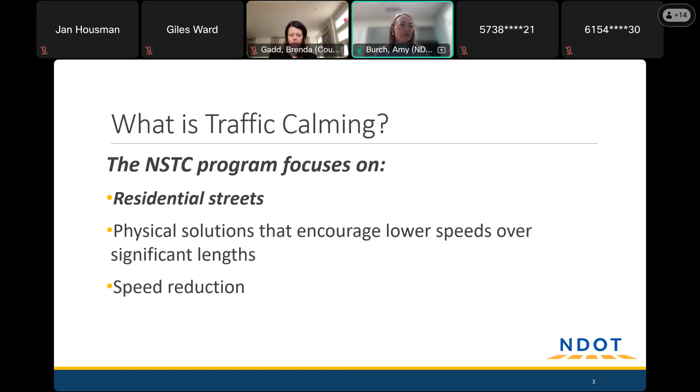So let's talk about traffic calming. What is it? The Neighborhood Street Traffic Calming Program focuses on residential streets, similar to Estes Road. What we're doing is implementing physical solutions that encourage lower speeds over the length of the street, really targeting vehicular speed.

Our 3 E's of traffic calming: education—we do a lot of education through social media, NDOT does a lot of social media engagement and education, as well as all the meetings we have for each individual street, where you're learning about speeding and traffic calming. Then there's enforcement, which is the job of NDOT's partners, the police department. They are certainly partners in the goal of reducing speeding across the city, but the police cannot enforce speed control across all the streets 24 hours a day, 7 days a week.

And so engineering is the part that NDOT mainly focuses on, and that is how do we modify the design and character of the street to encourage drivers to drive at a slow, appropriate speed.

One of the main reasons we're doing this is for safety, and NDOT's commitment to Vision Zero.

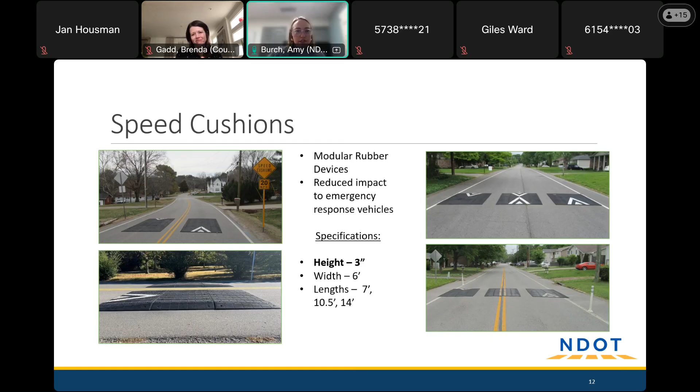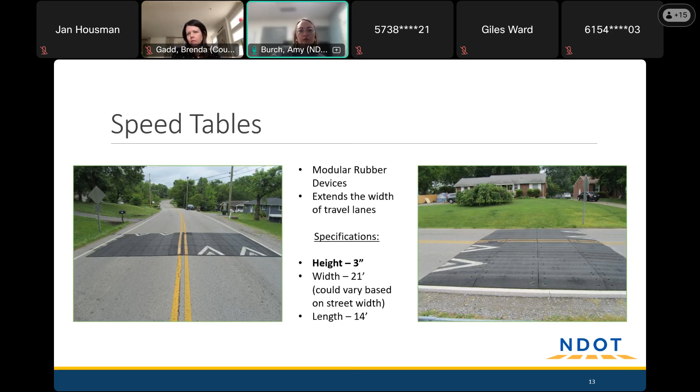Speed tables are made out of the same material, but they are formed in a different way across the width of the street, so they stretch the whole width instead of having those gaps like you saw on the speed cushions. We use these less often because we don't want to cause additional delay for emergency vehicles. So they're used less often, but they do have their place sometimes. Same material, markings, signs, all very similar.

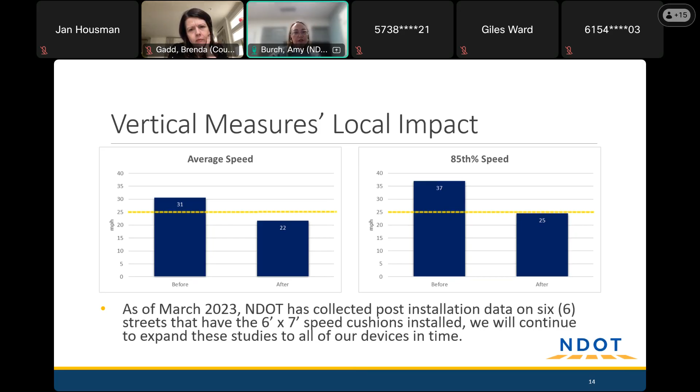NDOT has done some before and after studies of speed cushion installations across the city, and found that they are very effective in achieving our goals of slowing speeds. We studied 6 streets, and the graph on the left shows an average speed comparison before and after the speed cushions were installed. The before speed was 31 miles per hour, and after installation the average speed went down to 22 miles per hour. On the right is the 85th percentile speed comparison. The before speed was 37 miles per hour, and the after speed was 25 miles per hour. So very effective in helping us reach these goals.

We also use radar feedback signs quite a bit. You've probably seen them on a number of streets around Green Hills and elsewhere. These are signs that show a driver their speed as they approach the sign, and it's a reminder for drivers. Some drivers just don't realize how fast they're going, and this puts it in their view, and they slow down. We've seen effective results here as well using this tool, seeing the average speed go down by 6 miles per hour, and the 85th percentile speed go down about 7 miles per hour.

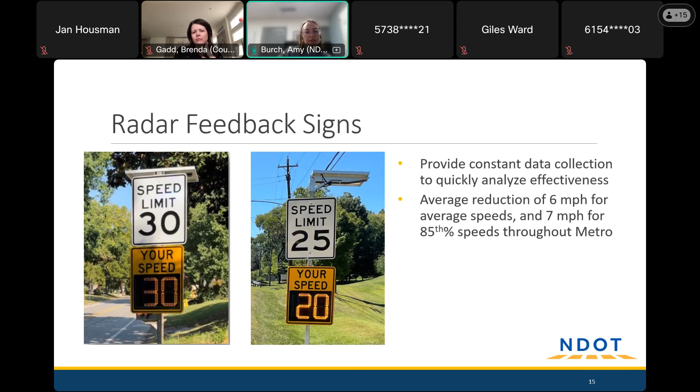These are often used in places where vertical measures aren't desired or not possible to install. We aren't able to install vertical measures on steep hills or in tight curves. So sometimes these tools, the radar feedback signs, are best to install in those locations.

Street narrowing: sometimes we have residential streets that are wide, and it just feels very open for drivers, which encourages some speeding. So we've implemented edge lines to narrow the travel way. This can also create a little bit of a shoulder for pedestrians, increasing their comfort.

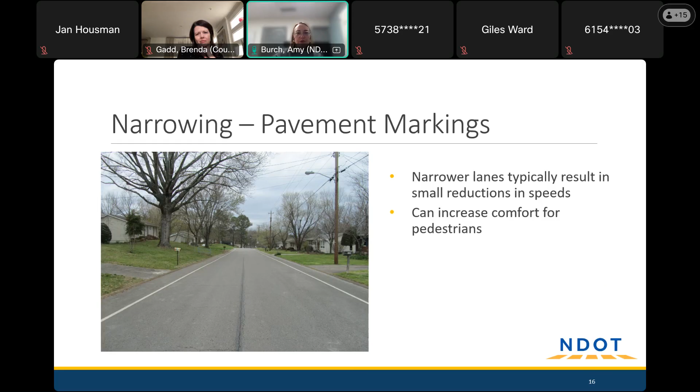We're also doing what we're calling safer shoulders. This is another narrowing tactic, but a little bit more pronounced and protected for pedestrians to use the edge of the roadway where the width is wide enough. We do that by incorporating some striping as well as delineator posts to dedicate that zone for pedestrians. We have to have the right amount of width to implement this, but it can provide extra space and safety for pedestrians. It can also impact on-street parking in certain places, so we always want to talk with communities about that option before doing it.

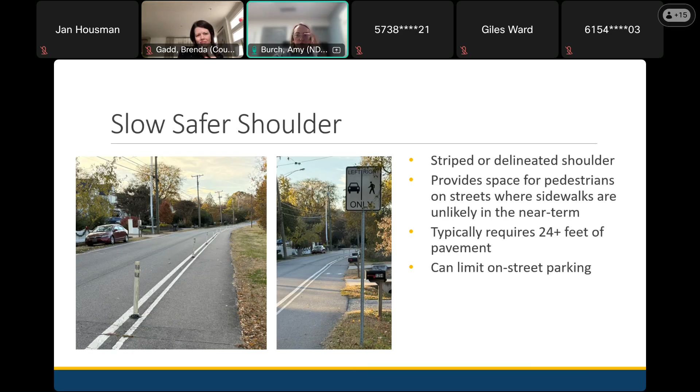Bulb outs are an intersection tool used to essentially tighten an intersection. Sometimes we've got intersections that were designed ages ago and are just too big and not necessary for turning movement, so this reduces the speed of turning maneuvers. It can increase visibility for drivers and pedestrians, and narrow the crossing distance for pedestrians by striping out some of that excess pavement width with paint.

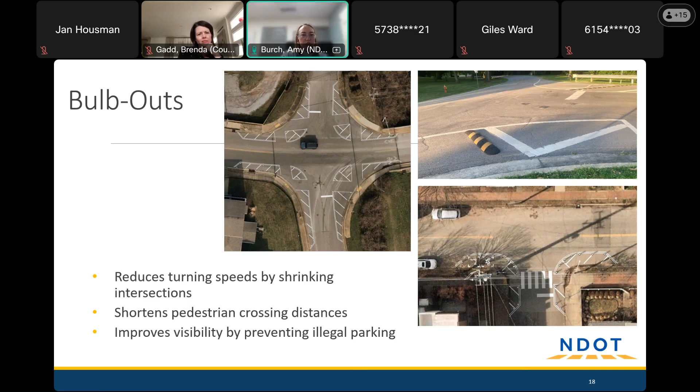We're also using delineator posts, like those white ones we talked about earlier, and incorporating in the top right corner these little speed bumps, only in the shoulder area, not the driving area, which can keep drivers from speeding and using that excess pavement. These are usually incorporated more in urban areas, but can have some uses elsewhere when the conditions are right.

Chicanes is another tool. We have to have all the right conditions for this kind of treatment, the right width and so forth. Essentially, we're taking a straight street and adding horizontal curvature and deflection so drivers have to divert their straight path of travel to stay in their lane, which causes them to slow down. In this case, it's done with on-street parking alternating side to side. I think Kenner has this treatment nearby, so you're probably familiar with how it works.

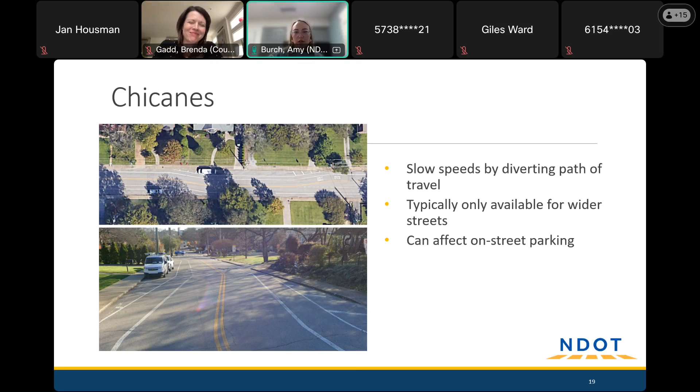Pinch points is a tool we're using. I believe this pictures a street in East Nashville, but essentially it adds some islands that takes the street from two-way travel to one-way, so approaching traffic in opposite directions has to yield to each other as they pass through this point in the street. At certain volumes of traffic it's not appropriate, and for certain classifications of street it's not appropriate. I don't think this is something we could do on Estes Road, but it may be more appropriate on smaller residential streets with speeding.

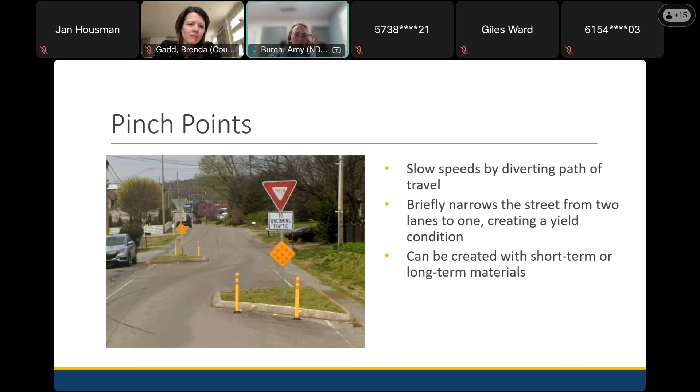And then traffic circles, another tool that's used. This design layout is rubberized curb installed with asphalt backfill. Essentially these are intersection islands installed in the middle of the intersection, central islands, very similar to roundabouts where you travel counterclockwise around them, and it slows traffic down as they pass through the intersection because they have to divert around this central island. The intersection needs to be wide enough to fit this in, so it's not always a tool we can use on every street, but we have used them in the past.

So that's the end of our toolbox, and I don't see any messages in the chat, so I think I'll move on to our next slide, which is our proposed plan for Estes Road. Amy, I think we had a couple of folks that may have joined after you started.

Before we go into the proposed plan, I wanted to recap some of the things you covered. How did we get here? We got here because NDOT offers a traffic calming program to neighbors who live, reside, and own property on neighborhood streets, and they apply for that program. The streets are then evaluated, which is what Amy was going over at the beginning, and then they look through the tools they have and have initial meetings with the neighborhood as a whole, as well as property owners who own property and reside on the street that applied.

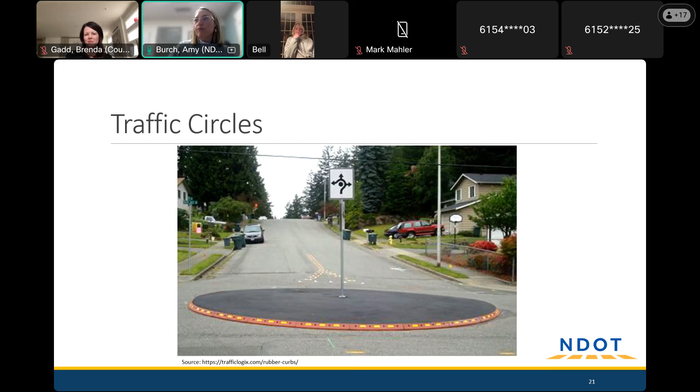So I appreciate all the feedback and information, that's helpful as we move forward. I just want to state that we've put together a concept plan as a point to begin conversation with you all about what to do on Estes Road. We've looked at the street and the data and feel that a plan of speed cushions is feasible here, and looked at the spacing and tried to implement our typical spacing right around 400 feet or so. It looks like some are a little longer and some are a little narrower, but let me orient you and then we can go into questions and more details.

North is to the right of your screen. I've marked the all-way stop at Woodlawn at the right of your screen, and these trapezoids represent our speed cushion approximate locations and spacing, so you can kind of see that on the aerial. Then as you move south, I've marked the Woodmont Park and the location of the marked crosswalk on Estes Road, and then another two sets of cushions as you go further south, and I've marked the traffic signal at Woodmont Boulevard. So that's kind of to orient you.

So it looks like we've got seven sets of cushions called out. They would lay in the road similar to this image here in the top. We've marked them with the signs, of course. There are some special treatments we would incorporate around the park, specifically where the on-street parking is along Estes Road, to one, keep drivers from trying to go around the cushions and into the parking area, and make sure that people stay in their lane as they drive around or drive through Estes Road.

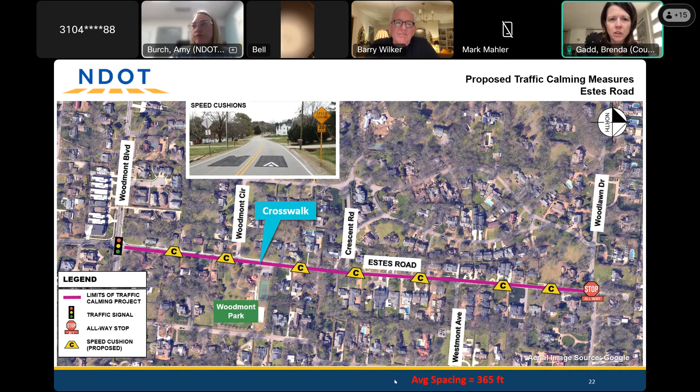I think we may have gotten questions answered. You have Amy's email, feel free to email me. I think I respond to everyone. I spend about 30 hours a week trying to reply to emails. If I've missed you, I apologize. But I can make sure, if you want to reach me because you don't have Amy's email, even though it's right there on the screen, I will make sure to get you connected directly to her or anyone else.

And then we will get this, hopefully we can maintain some of this warm weather for a park walk with park staff to talk through some of those other solutions that can hopefully marry with this as well. And I think I must have interrupted someone, I apologize, so I'll stop talking. So I really appreciate everyone being here. Thank you, I do too.

So I just want to close out if I can and say that I've been taking notes and hearing your questions and comments. And so what we're going to be doing is some field work and kind of refining this plan and taking in the feedback that we've received. So I appreciate everyone's time this evening and thoughtful comments. It's really great to work with such an engaged group. So we'll be putting that plan together.

Once it's ready, I'll be reaching out to a council member to begin that planning of the next meeting. So you can probably expect that in the next 2 months or so to have that next meeting, and that's what we'll be targeting. And I look forward to refining the plan and working with you all moving forward.